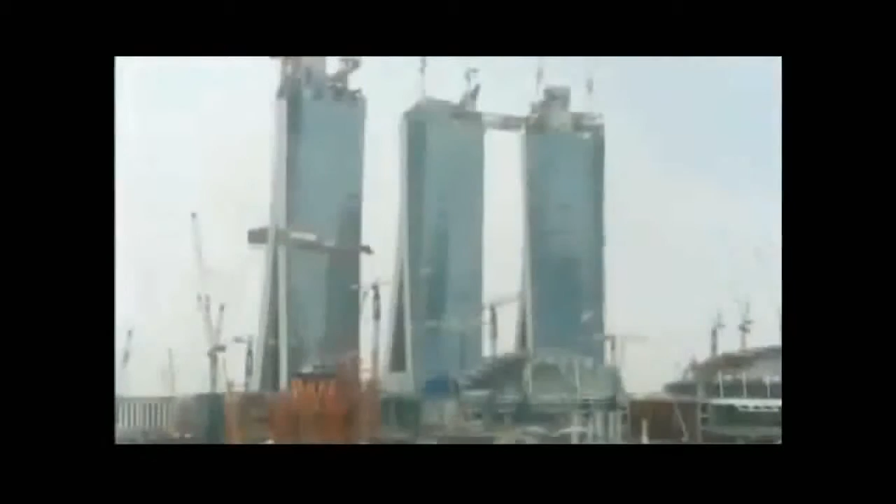Engineers have to build not one, but 3 skyscrapers that will shoulder a sky park as big as an aircraft carrier. Worst case scenario, we get stuck. They have to devise ingenious solutions to assemble a 60-meter tall museum of impractical dimensions, install giant artworks, and erect seemingly floating pavilions for shopping and entertainment. If engineers succeed, they will create a virtual city unto itself.

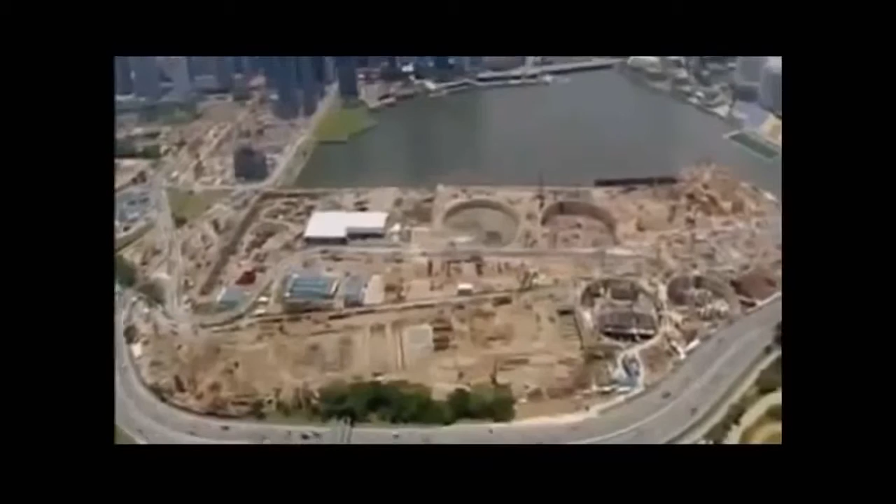Singapore. The Southeast Asian country is smaller than New York City. The lack of space forces it to build its largest leisure and entertainment hub to date on a small tract of reclaimed waterfront land. The Marina Bay Sands. It's not one megastructure, but many. Serious challenges lie in the array of buildings that form the unique complex.

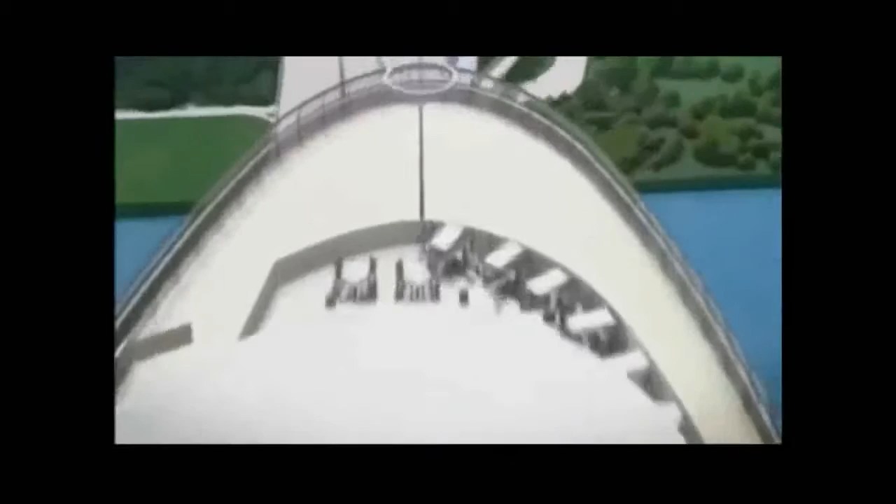3 55-story hotel towers slope at such great angles, they're in danger of buckling under their own weight. An even bigger problem is the hotel's roof. A 340-meter sky park spans its length, containing gardens, outdoor pools, and the world's largest cantilevered observation deck. But how do you build something as big as an aircraft carrier, 200 meters in the air?

In the hotel's atrium, mammoth works of art have to be somehow incorporated into the architecture. Its challenging centerpiece, a 15-ton mass of steel by a renegade artist from Britain. A 60-meter tall art science museum is designed for maximum visual impact. It will be to Singapore what the Opera House is to Sydney. Only one problem. It seems too impractical to construct.

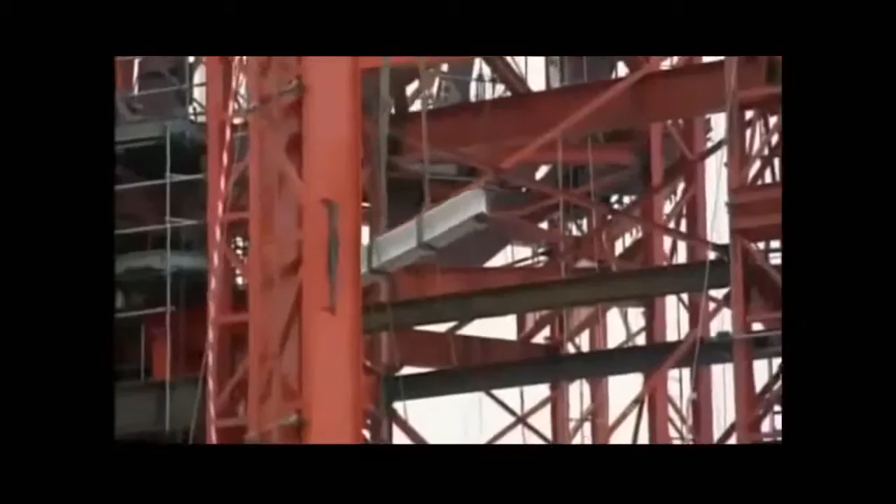And a set of dramatic glass-encased pavilions, while themselves pose little challenge, have to be built in water. The man behind the Marina Bay project understands the risks, but he believes that anything short of astounding will fail. Sheldon Adelson, one of the world's richest men and CEO of Las Vegas Sands Corporation.

What we hope to accomplish is to change the face of Singapore tourism. So we expect a very successful development. That is by far the largest and most expensive single project we've ever undertaken. It'll cost about 5 to 5.5 billion US dollars. It's a lot of money. Now, I know $1 billion doesn't buy what it used to, but by any measurement, it's a lot of money today.

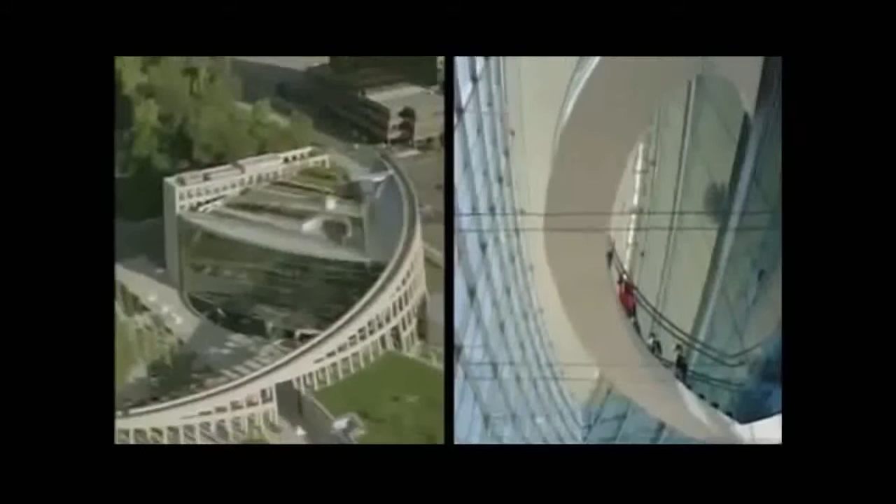Adelson believes his huge investment is safe in the hands of Moshe Safdie, a world-renowned architect. Safdie is recognized for his use of dramatic curves and geometric patterns. The Marina Bay complex will be his largest and most difficult project yet.

I think that architecture has to be timeless. Therefore, what it espouses, what it provides, needs to be something that has a long life. What's unique about Marina Bay is all the pieces coming together. You can't think about it as individual buildings. You've got to think about it as a piece of city. It's much more a symphony than it is a sonata.

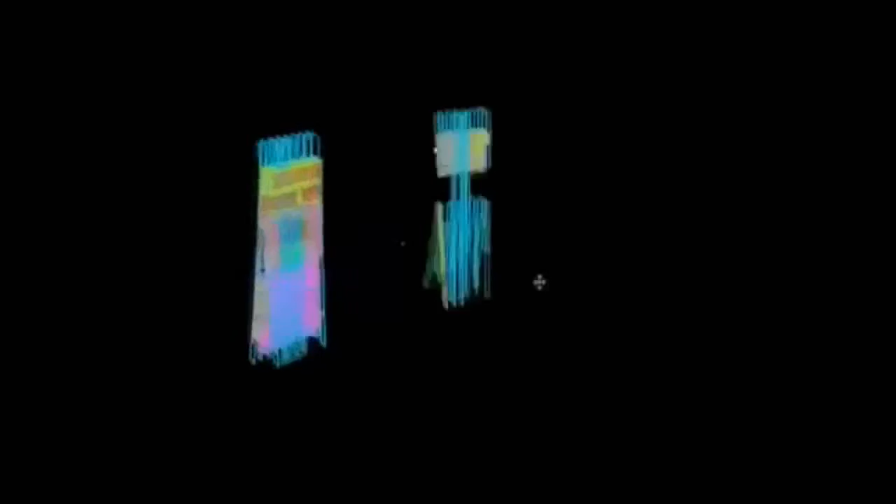On the ground, engineers are more concerned about the reality of building Safdie's vision. This is the North Retail section area. 30-year veteran John Downs is in charge of overseeing the entire project. The design is very, very diverse, and each component of the project is totally different from the others. For a project of this size, with the planning, the design, the construction, you'd be expecting somewhere between 6 to 7 years. Here is basically a 3-year turnaround.

The first and most critical construction task is to secure the footprint, though this normally straightforward job proves otherwise, since the site was originally allocated for boats. The complex sits on 560,000 square meters of reclaimed land, part of a decade-long plan to revamp Marina Bay, a former saltwater estuary that's now a freshwater reservoir.

Beneath the reclaimed land, which is essentially a seabed, is a dangerous layer of marine clay. Sometimes called black toothpaste, marine clay has very poor structural properties. If not given complete respect, the unstable marine clay is potentially fatal. In 2004, Singaporeans discovered the lethal consequences firsthand. A routine excavation in an underground tunnel for the mass rapid transit network causes a collapse, creating a gaping hole in the Nicoll Highway, killing 4 workers.

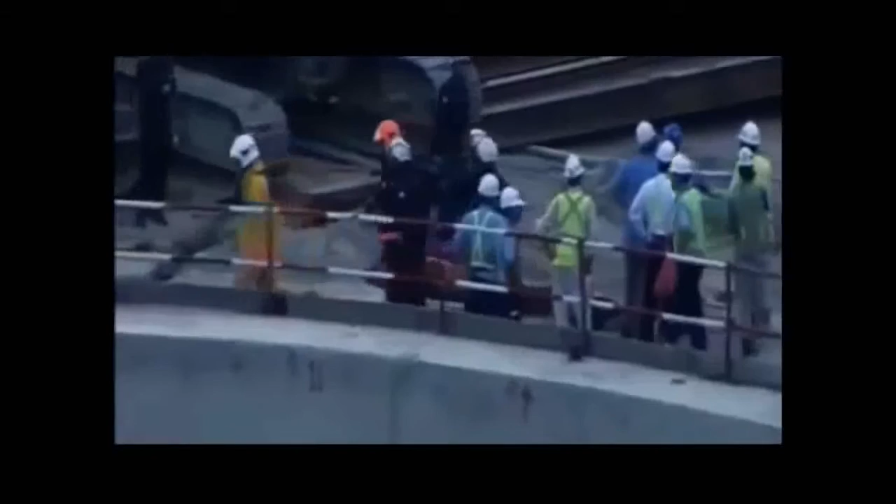The ground conditions in which they were building the Nicoll Highway were not dissimilar to those we are encountering here. They had also soft clay, they had similar depths of excavation between 20 and 37 meters. One of the big things that was learnt in the Nicoll Highway collapse was the importance of monitoring movements and the control of quality as the construction proceeds.

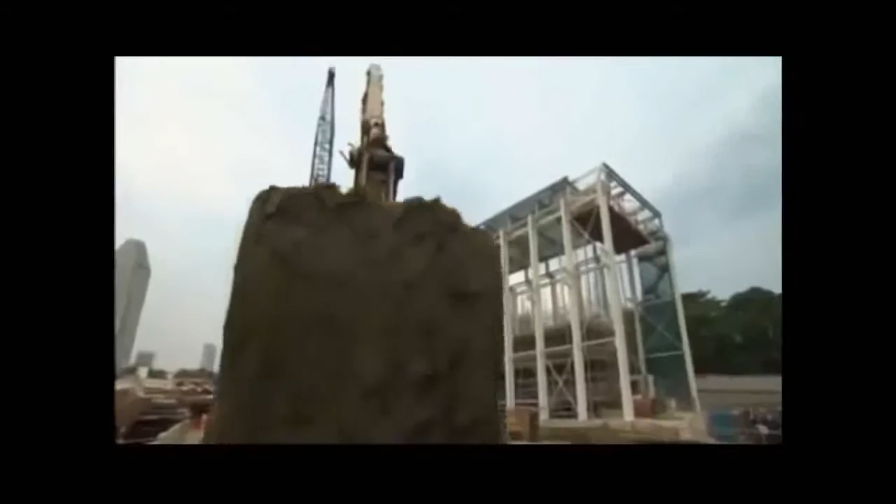Marine clay is an old foe of engineer Mike Barton. He's defeated it in the past by understanding how it behaves. The big problem with marine clay is that it is so soft that when you dig out the inside, the walls will move and potentially collapse and allow all the surrounding water in the bay into the excavation. So, before work can begin, the unstable building site needs major fortification.

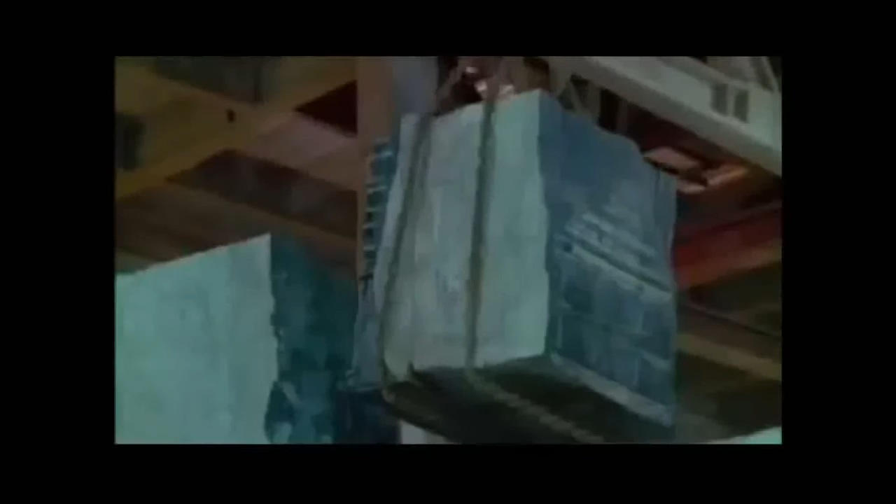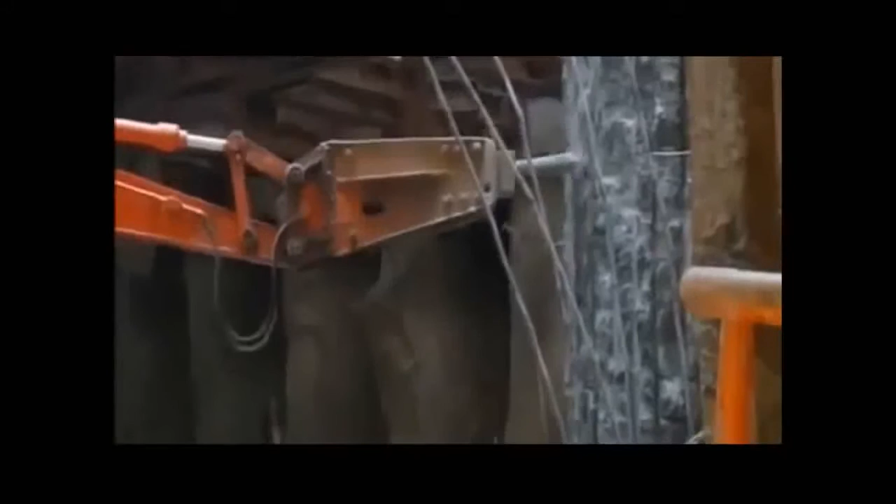To combat marine clay, engineers decide to build giant concrete walls to create stabilizing perimeters for the larger buildings, known as diaphragm walls. Up to 1.5 meters thick, diaphragm walls are steel-reinforced concrete sections, pounded 50 meters into the ground. They form watertight enclosures for men and machines to work round the clock. In just 1 year, over 4,000 meters of diaphragm walls help produce a rock-solid foundation.

The diaphragm walls that we constructed in a formation which we called a peanut formation, which is 2 circles joined together, and a donut formation, which is circular, is that they are able to withstand very, very large forces from the marine clay without any movement. They encapsulate an area that's bigger than a football pitch that enables us to excavate very quickly and to build structure up very quickly.

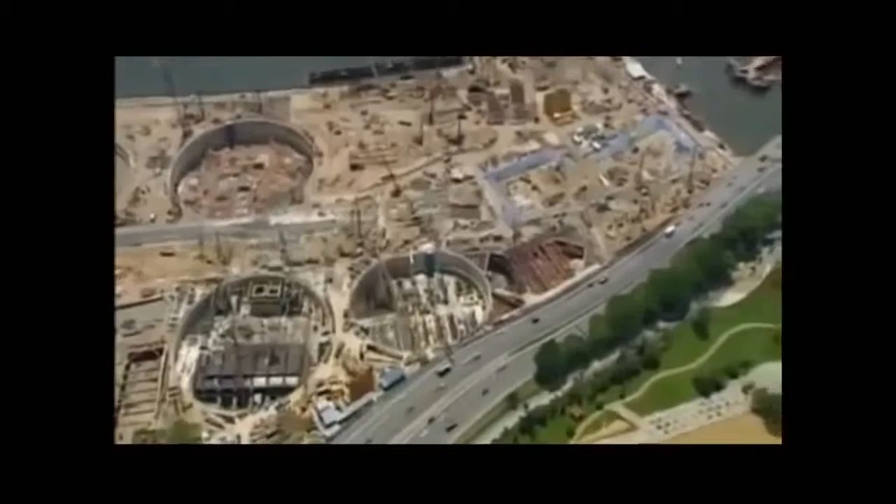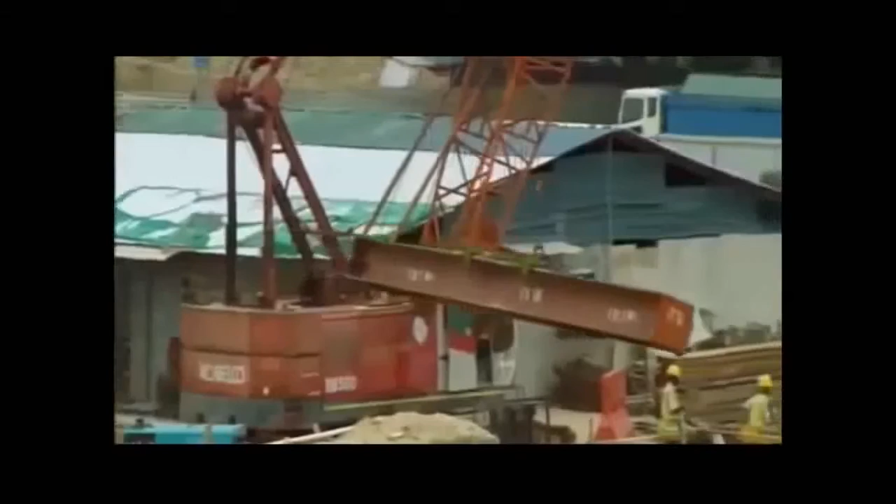Securing the footprint of the Marina Bay project has already taken a year out of John Downes' schedule. He now faces the difficult task of erecting the resort's many buildings in a space of just 2 years. Just managing the whole logistics of that, including the construction methodology, is very, very challenging for us. 1, 2, 3. To meet his tight deadline, Downes chooses the most direct solution. He hires 16,500 workers to construct every single building, simultaneously. It's like leading a small army. So organizational excellence is key.

We're just on the edge of Singapore in the CBD here. So rather than lose the contractors and the workforce to go off-site, we've built our own 3-story project office. We have all of our contractors, our subcontractors here. We house our resident site staff, we have our project management team, our construction management team, our design management team, and the logistics here.

Come lunchtime, the monster workforce creates another massive challenge for Downes. He responds by building one of the world's largest site canteens. We've got 13, 14 different food styles here. You can see by my shape and size that I eat here every day. I enjoy this food. So here you can see the project bakery.

It has its own ovens. It's set up for breakfast. We cater for sandwiches during the course of the day. Can I take a sausage roll, please? So, freshly cooked food, straight from the oven. We stand by our products.

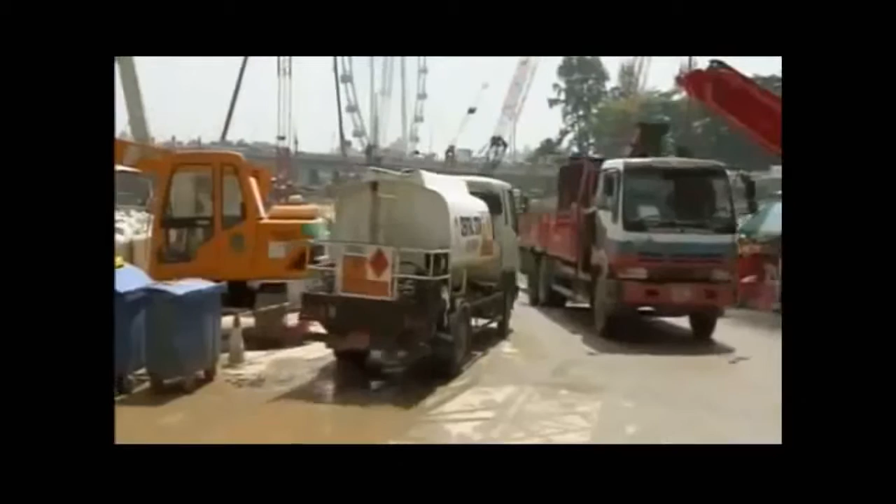The tight schedule also creates problems at the hotel towers, where engineers are already struggling with a congested site. The important thing to do is to make sure that they come in and deliver the goods straight away and then get out again. We don't want too many vehicles on site at the same time. To speed up construction and alleviate traffic congestion, engineers turn to a method that's proven itself countless times in the field: precast concrete casting.

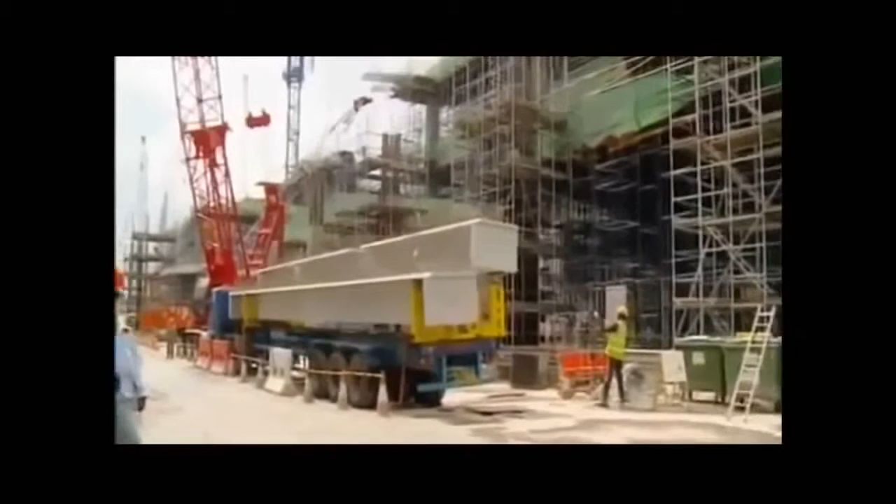Hotel walls are made on site in the thousands. And workers laying the floors are so proficient, they produce one floor per 4-day cycle. It's an impressive display for a conventional solution. But the structure they're attempting is anything but conventional. The key challenge of building the hotel towers is its unusual design. Unlike other skyscrapers, part of the towers slope at incredible inclines. Like a set of collapsing dominoes, the towers could buckle under their own weight if a practical building solution is not found.

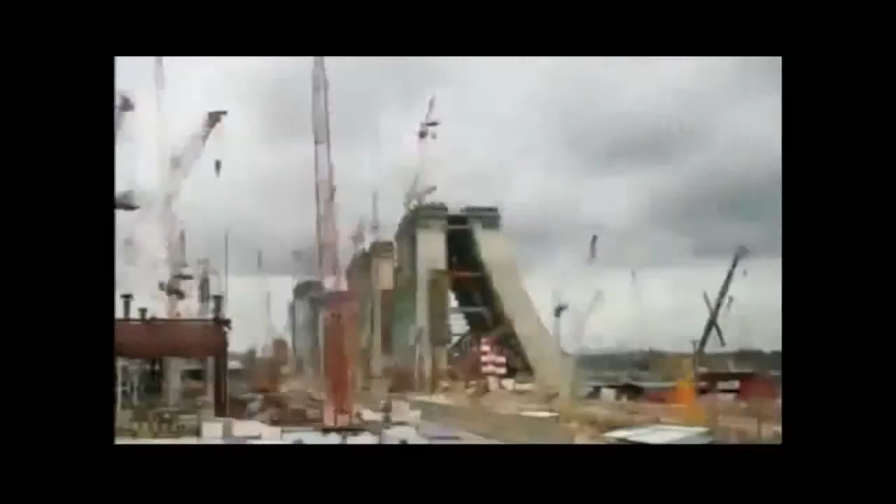It's a major concern for engineer Craig Glover. I've been in the industry for 25 years, done a wide range of projects in many different countries, but nothing compares to this whatsoever. There was nothing we could take reference from across the street, on the next high rise, or across town. This is a new frontier. Costing a staggering $5.5 billion to build, the Marina Bay Sands could be one of the world's most expensive mistakes if engineers can't solve the tower's problematic structure.

Engineer V.C. Cheong leads the design team, and their solution comes out of left field. If you look at the configuration, it's not a straight tower. It's with a sloping leg. So all this sloping leg actually is inducing a very huge external force onto the structure. We cannot build it without any support. So we actually formulate a solution to prop up the sloping edge.

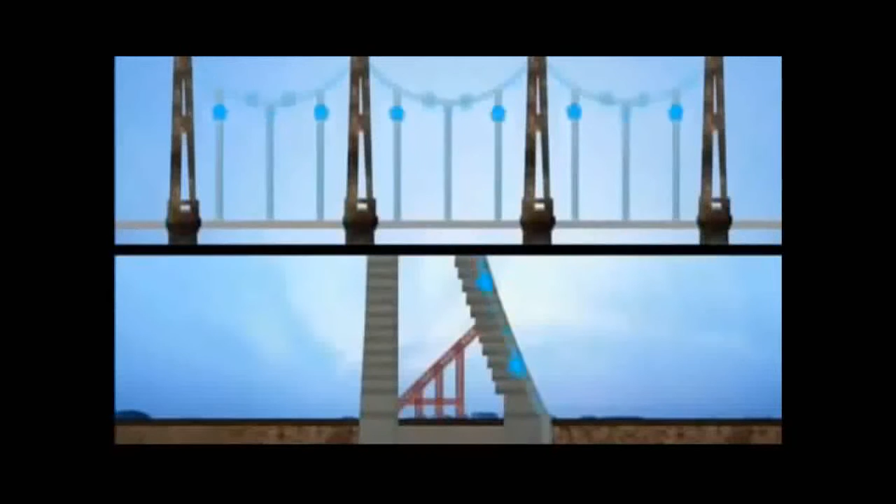Using a technique they've never employed before, engineers build large temporary struts made of strong structural steel. They prop up the sloping towers as they rise. Like a suspension bridge, high tensile steel tendons, also known as tension cables, give an added layer of support inside the walls. In theory, both the struts and the tension cables are temporary and will be removed once giant link trusses connect the towers at the 23rd floor.

The sheer weight in concrete is enough to topple the towers at level 8 if the engineer's calculations are wrong. To reduce the chances of failure, Glover and his team make a radical decision. Instead of removing the temporary tension cables in the tower walls, they make them permanent supports. I feel good it's in there because it's added strength, it's added support.

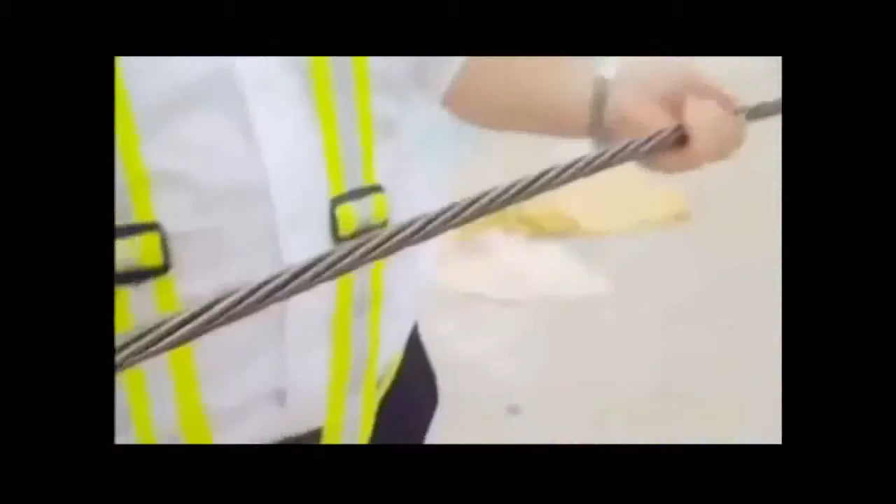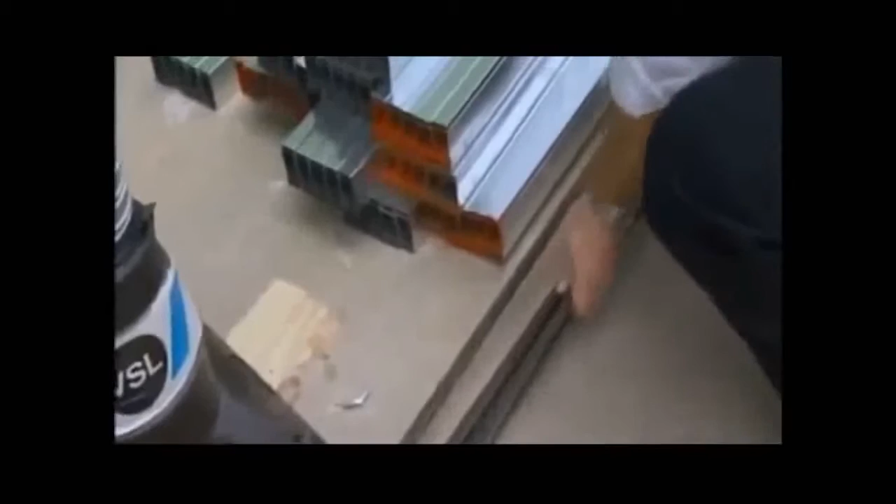We have a twined network here of high-strength steel. And what we do is we bundle these up so they form a cord with multiple strands inside this conduit. We place this conduit inside the walls prior to casting the concrete. So what we then do is once the concrete is cast, we anchor one end into the concrete. So we then put a very high strength hydraulic jack onto the collar and one by one pull these strands through and tension them up. What that does is basically pull the building back and hold it in place.

If these cables were to suddenly break or if they weren't in place, we wouldn't be able to control the self-weight as we build more and more of the building up. So it's a very important part of the actual engineering of the solution to hold the building in place until we can connect it. Despite the team's quick thinking, the true test of their engineering decisions will only happen once the main support struts are removed and the massive link trusses installed.

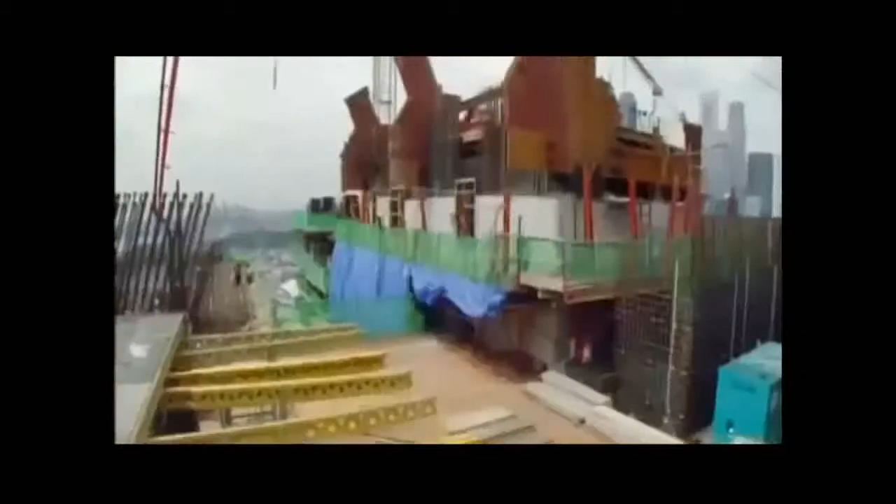Link trusses are huge reinforced steel brackets that bind the towers at the 23rd floor. Once their installation is complete, they transfer the sloping tower's weight completely away from its temporary struts. Once we're satisfied that we don't have any stability issues, then we can bring the large hydraulic cranes in and member by member start to dismantle the struts. We've got a lot of time pressure, so we've just got to make sure that these things keep moving. It's done its job holding up the building, now it's holding up the job.

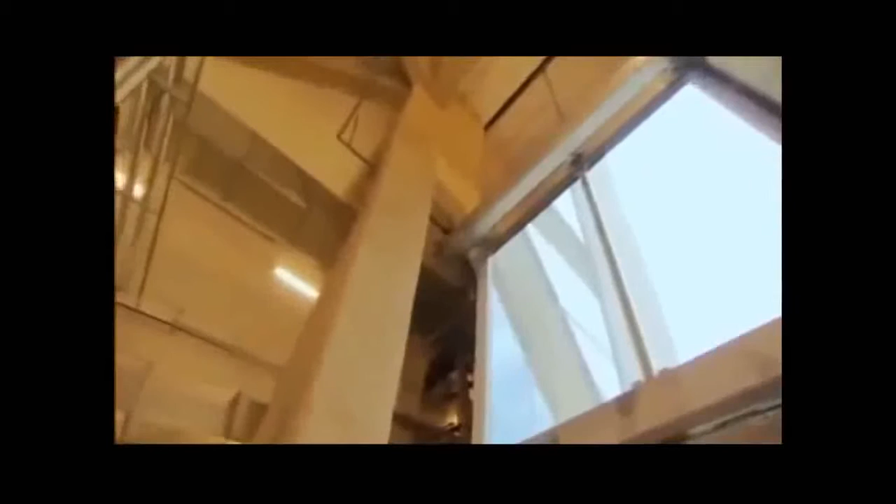As the last pieces of support struts leave the site, Glover and his team can finally breathe a sigh of relief. The link trusses are holding the building load. So far, so good. It's a lot of theory, a lot of calculations, but until you really do it and really get it out of the building, you never quite know. I'm always waiting for the phone to call in the middle of the night that something's gone wrong.

Not all the structures have ended up according to plan. The 60-meter-high Art Science Museum is facing a major design overhaul. Planned as a venue for blockbuster exhibitions on the arts and sciences, its bowl-shaped roof doubles as a 3,000-seat amphitheater. Unfortunately for engineers eager to start its construction, architect Moshe Safdie isn't happy with its current shape.

Somebody looked at them and said, looks like a bunch of bananas. In fact, Mr. Adelson said, looks like a bunch of bananas. I said, well, if they look like a bunch of bananas, we're not there yet. Do the structural engineers have a preference?

It's terrible news for Safdie's design team, especially its principal, Gene Dyer. There are times that Moshe will come in with an idea. We think it's quite exciting. We'll pursue the idea for weeks or even months. He'll come back and say, I want to change the idea. And we've already bought into the idea, so it's a bit frustrating.

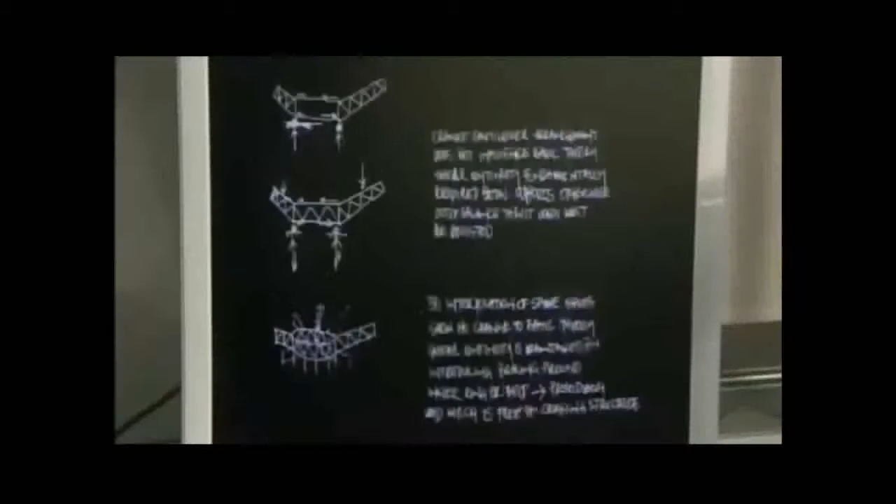To rework the unique geometry and dimensions of the Art Science Museum, Dyer and his team turned to advanced 3D modeling programs. It not only makes navigating the museum's complex geometric patterns easier, it shortens the process to a matter of days. The model is dynamic and it can be moved by just changing one or two elements. Moshe could experiment. He could make rapid judgments in a very short period of time about which way he wanted to take the project. This is a process that was impossible to do 10 years ago. Without the computer, this would take years and years and years.

To rationalize the new look into a buildable structure, architect David Robbins splits the museum into spheroid segments. We began to look at using different spheroids to define the different upper and lower surfaces of this building. That gave us a very rational way of describing the plan form to our clients. After months of refining the design, Safdie is finally happy with the result. The mathematical precision that we gave them made them even more beautiful.

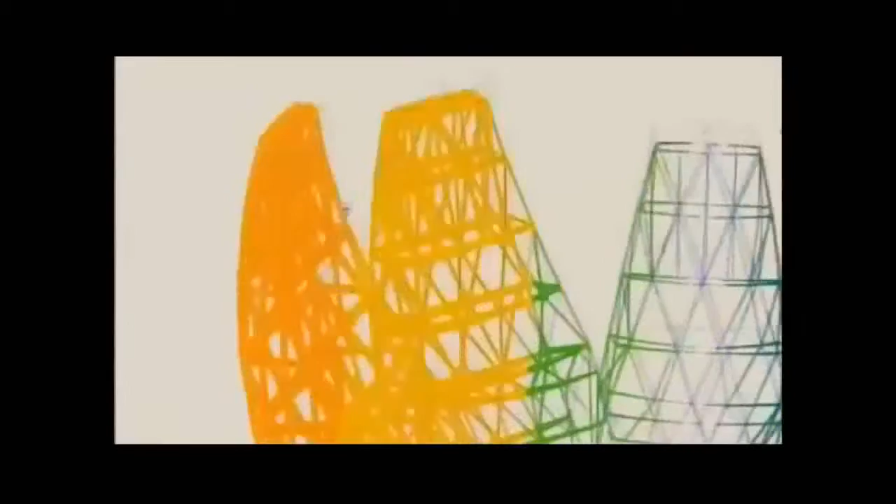It led some people to say, well, hand of welcome. Others said, is that a lotus? And the more ambiguous the associations, the closer I thought we were getting to our target. Because I think the least exciting buildings are those which have overt symbolic associations.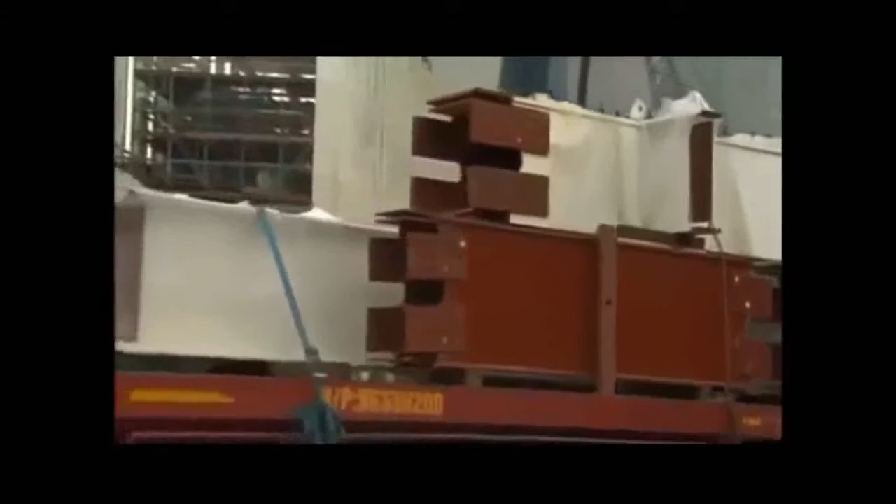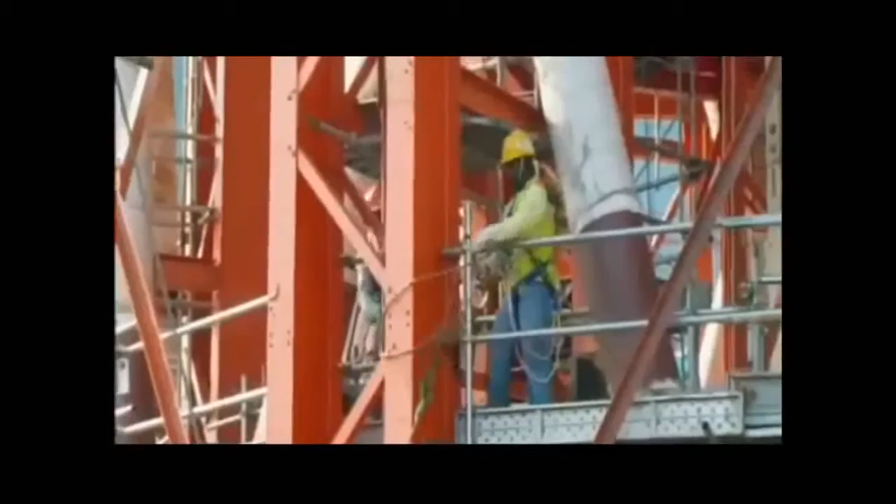Armed with the new design, engineers begin work on the museum's 60-meter-high superstructure. A staggering 5,600 steel elements, weighing some 5,200 tons, are prefabricated to exact specifications. They are then trucked onto site and assembled. It's like putting together a giant jigsaw puzzle. Each element has to be installed with pinpoint accuracy. If it's even a few millimeters off, engineers will have to start from scratch.

Engineers of the massive atrium at the base of the towers are facing an equally tough construction process.

Safdie has come up with a challenging design. He wants to inject art into the atrium's architecture, so that visitors will feel like they're walking through a grand Gothic cathedral. In medieval times, if you think of a Gothic cathedral, there's the architecture, there's the stained glass windows, there's the sculptures on the pinnacles. You cannot draw a line and say art and architecture. Art and architecture are one, they're singular experiences. And I think what we try to do here is come back to this integrative mode.

To create the centerpiece of his vision for the atrium, Safdie commissions renowned British sculptor Antony Gormley. Famous for his unusual approach to art, Gormley is the brains behind the Angel of the North sculpture in northern England. What he's about to attempt is proving to be more of a construction challenge than an artistic one. A cloud-like sculpture some 40 meters long, made up of 15 tons of high-grade stainless steel, hung 12 stories above the atrium.

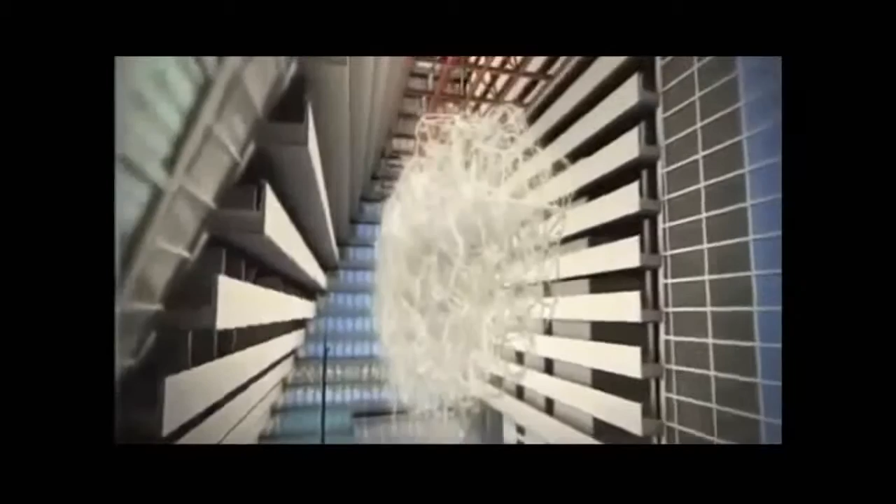The Angel of the North is, in a way, making a very traditional public sculpture because it's isolated in space at the edge of a valley. You can see it for miles and miles. It's very much about occupying space. This is about activating space. You can't see it for miles and miles. You have to be in the space with it. Each viewer, every person coming out of their hotel room will confront this big chaos thing and have to find their place in it. I think that's an exciting thing.

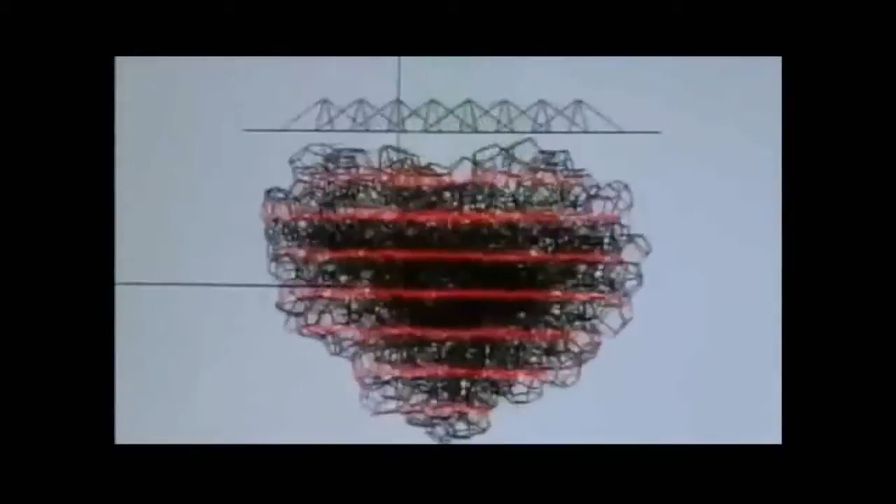Called Drift, Gormley's steel sculpture is so huge and so complex that it can't be sculpted using traditional methods. Gormley's team has to create state-of-the-art 3D computer programs that translate his ideas into buildable plans. But just as they're about to begin construction, a bombshell drops. September 2008, a global financial crisis wreaks havoc on markets. The flow of the hundreds of millions of dollars that keep the Marina Bay project going every month suddenly stops.

For engineer Matthew Pryor, it's a massive blow. I feel devastated. I mean, it couldn't be worse. Probably the worst day of my life professionally. There's no more money coming through. So unless we put some funding in place or there's something, we're going to have to shut the jobs down. There's a tough decision to be made, and we don't know what we're going to do just at this point in time. With the future of the multi-billion-dollar project plunged into doubt, all eyes turn to the man behind it, Sheldon Adelson. The next move of one of the world's richest men will determine the fate of the mega construction site.

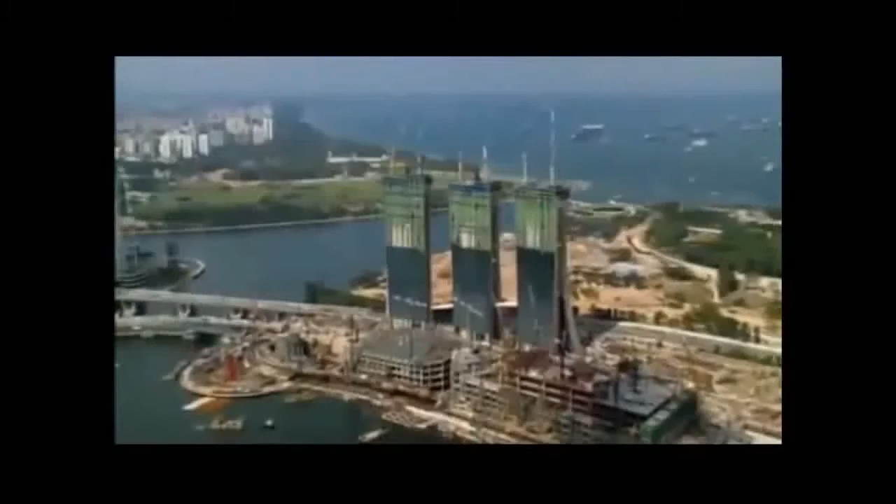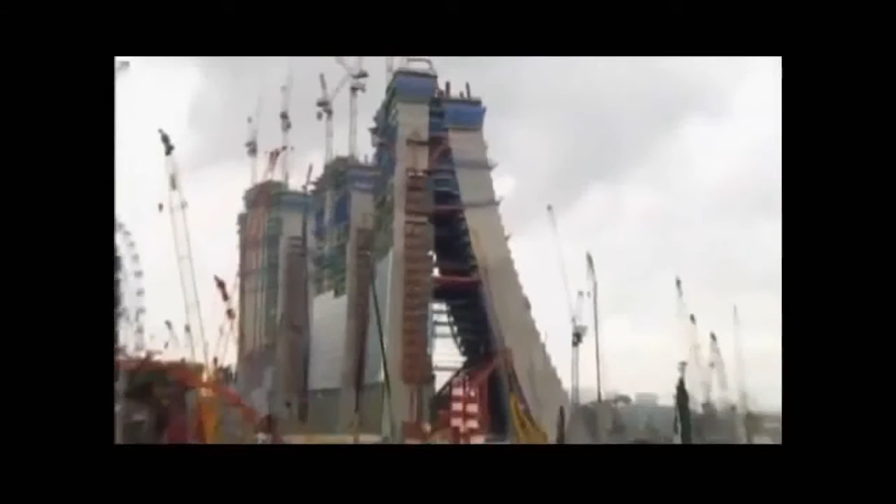The 2008 global financial meltdown is a haunting echo of the 1990s Asian crisis. Back then, progress on Shanghai's World Financial Center came to a complete halt for 5 years. For Adelson, that's simply not an option for the high-profile Marina Bay resort. His vision of changing the face of Singapore tourism is at stake, and so are billions of dollars of investment from his Las Vegas Sands Corporation. He prefers finding a stopgap solution to weather the storm. Throughout history, there has never been a trend that went straight up, nor a trend that went straight down. So it goes up and down. It's only a matter of time when things will recover.

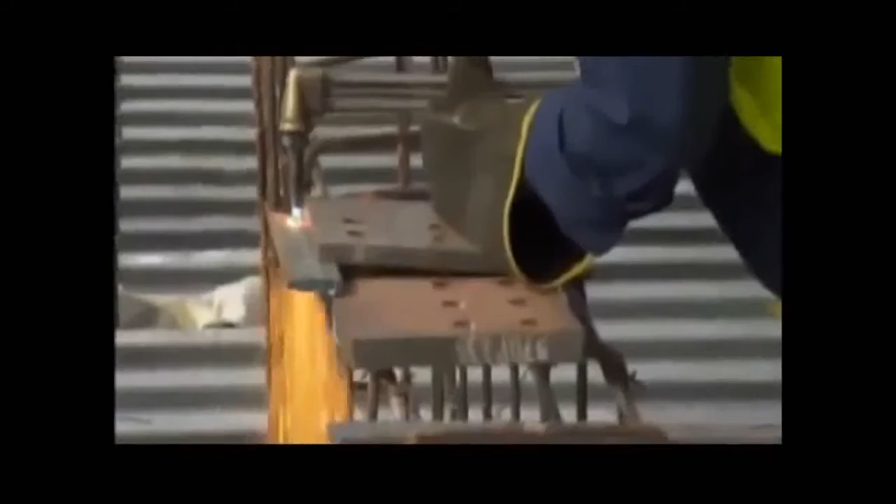In a bold move, Adelson pledges his vast personal wealth to the completion of the project, effectively ending any speculation of failure. There's a massive sense of relief in the company. I mean, everyone pleasantly surprised how quickly we've got through this and the fact we could hold it together and get it going again. So euphoria is probably the best way to describe it. With the crisis averted, construction on the 3 57-story hotel towers, the casino, theaters and convention center resumes at pace. Everywhere you turn, steel is being installed. It's vital reinforcement for every concrete structure on the 15.5-hectare site.

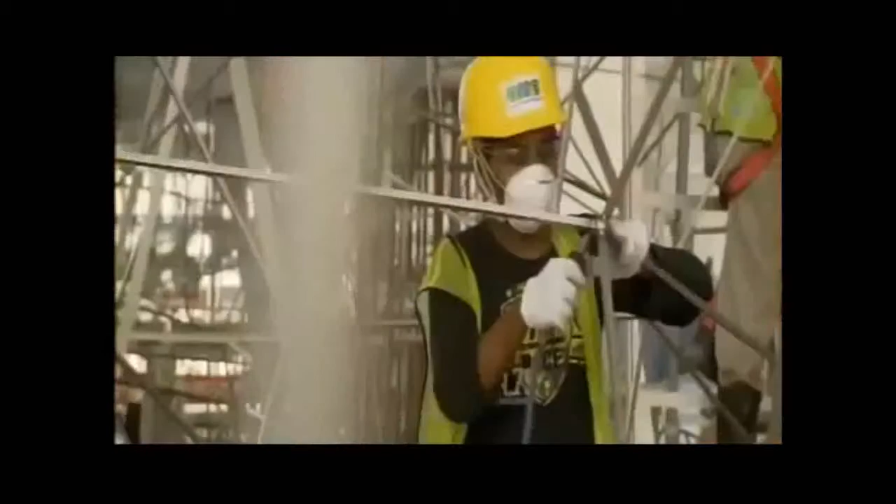For one project at the tower's atrium, steel is more than just reinforcement. To construct the 15-ton Drift sculpture by British artist Antony Gormley, engineers had to first laboriously prefabricate it into over 70 segments. The segments are then welded into 8 slices and will ultimately form the sculpture. It's a tricky operation, but engineers are able to complete it swiftly due to a system of codes and numbers that enable them to quickly identify what goes where.

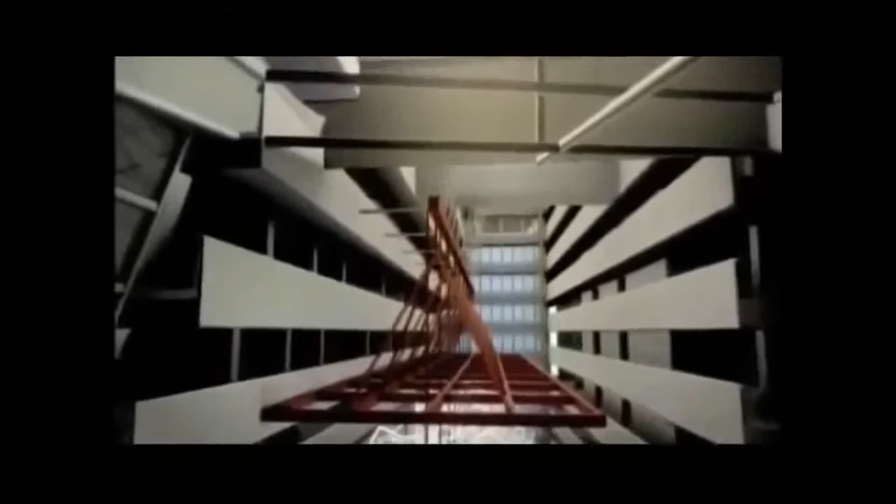Once all 8 slices of Drift are fully assembled, it's lifted up into position by a temporary lifting frame. A massive box truss on the atrium ceiling then takes over the load. In theory, the box truss will support the weight of the lifting frame as it's being lowered down. It will be a heart-stopping moment, especially for engineer Graham Stevenson. The lifting frame is about 9.5 tons, so when it picks up and gets some momentum, there's a potential that it just wants to flick over and rotate through its full 90 degrees, and we won't have it under control.

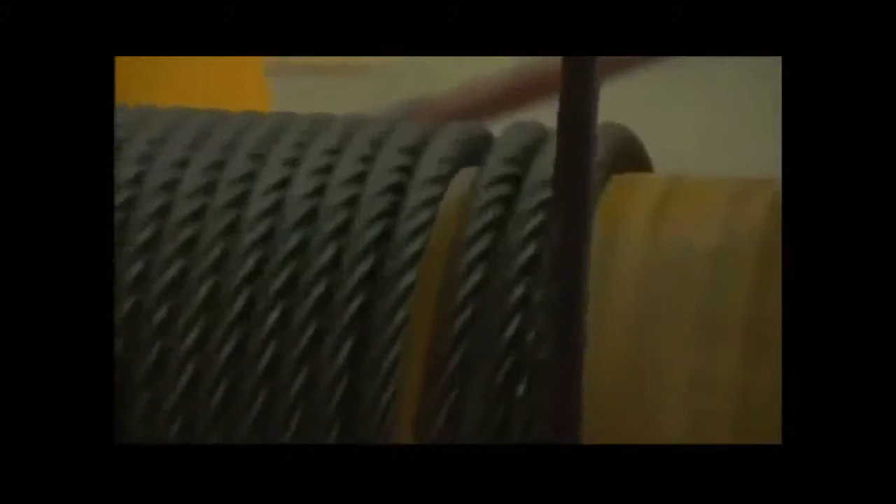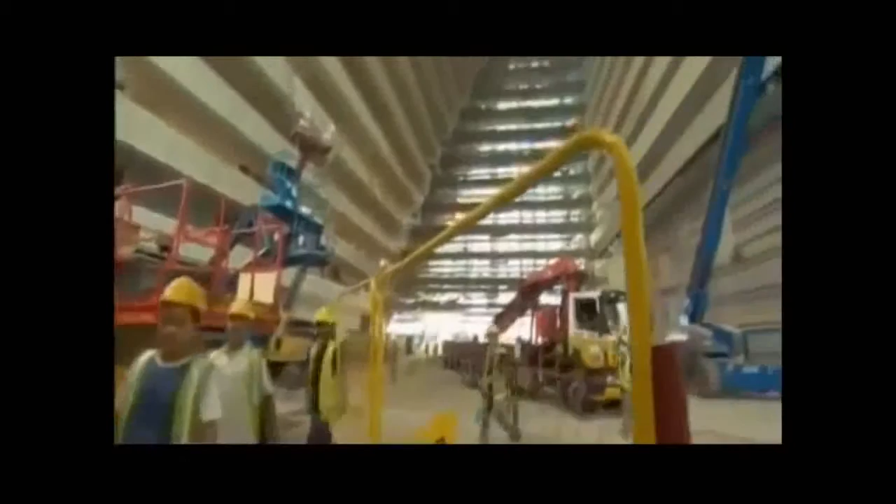Stevenson's solution: 4 powerful automated hoisting drums located at the 4 corners of the frame. They allow workers to control the strength and speed of the operation with high tensile steel cables. A spotter at the top determines the pace of the procedure and marshals the team. With their preparations complete, it's time to face the moment of truth. Sculptor Antony Gormley is as anxious as any of the team.

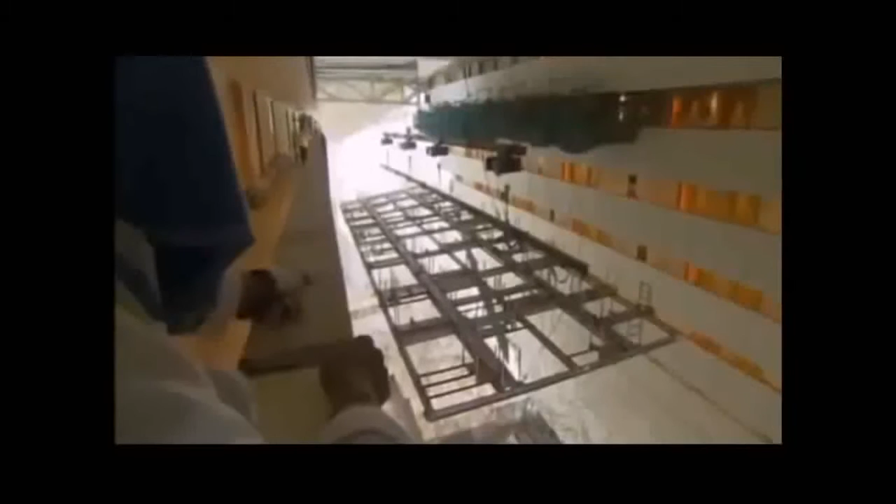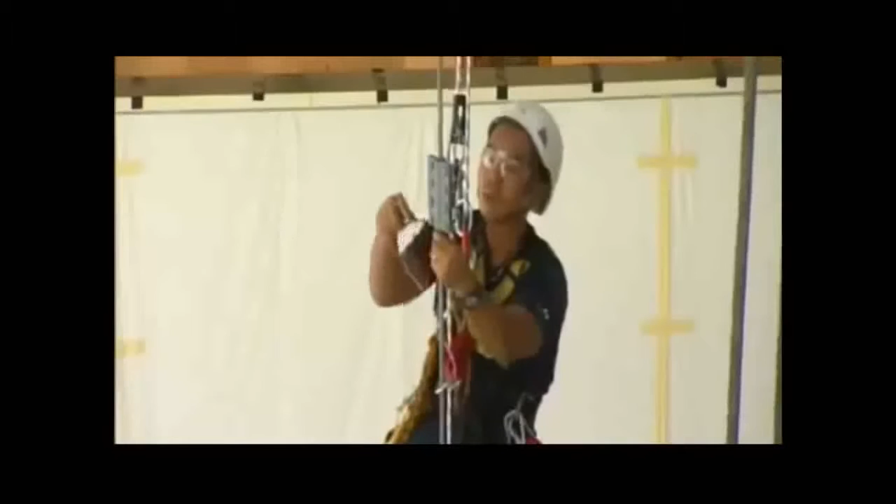The entire operation is estimated to take up to 10 hours to complete. As soon as the frame is in motion, there's no turning back. Midway through the lift, Stevenson receives reports of a potential problem. 22-story, number 7 temporary cable, scaffolding touching the cable. Why you got the temporary cable touching to the transverse? Yeah, but is it just the end of a tube? Yeah. So you can just cut the tube? Yeah. Problem solved.

But what was previously an estimated 10-hour procedure now turns out to be a 24-hour marathon lift. At 6 a.m. the following morning, they complete the job. Absolutely fantastic. The Gormley's now finally in its final position, so really an end of a long and exhausting day, and big thanks to everybody, but it's finally done.

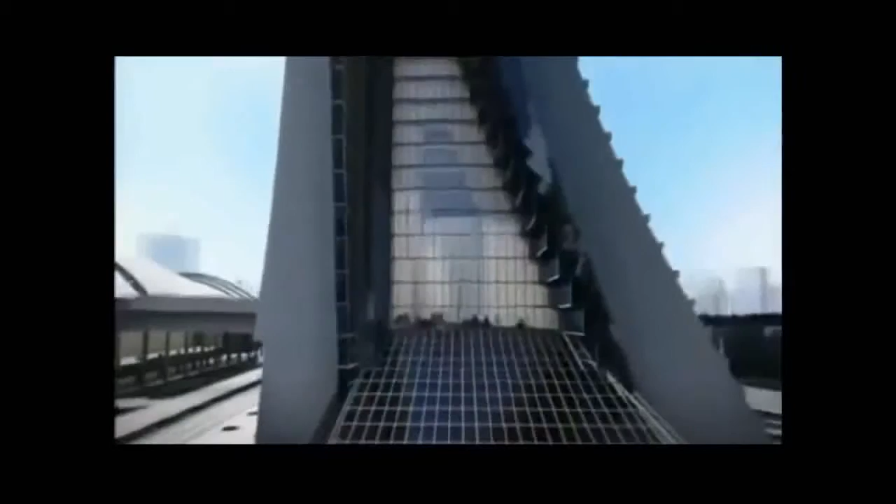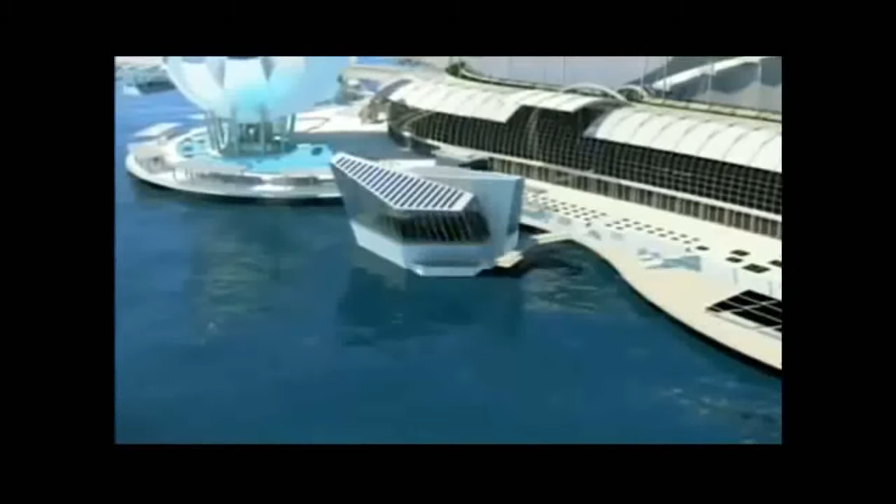While the drift settles into its new home at the hotel atrium, elsewhere attention is focused on one of the project's key features, the crystal pavilions. The two glass-encased buildings by the promenade are set to be the resort's premier shopping and entertainment complexes. But before engineers can make them a reality, they have to secure their footprint. And already a major obstacle threatens to sink their objective. The crystal pavilions are situated within the confines of Marina Bay. So to found it, engineers have to find a way to build in 6 meters of water.

The responsibility of tackling the problem falls on the shoulders of engineer Kurt Vella. I'm from Sydney. The underlying foundation in Sydney is sandstone, it's rock. All you need to do is just dust off the surface and you can build skyscrapers on it. Here it's very different. All the structures have to be heavily founded.

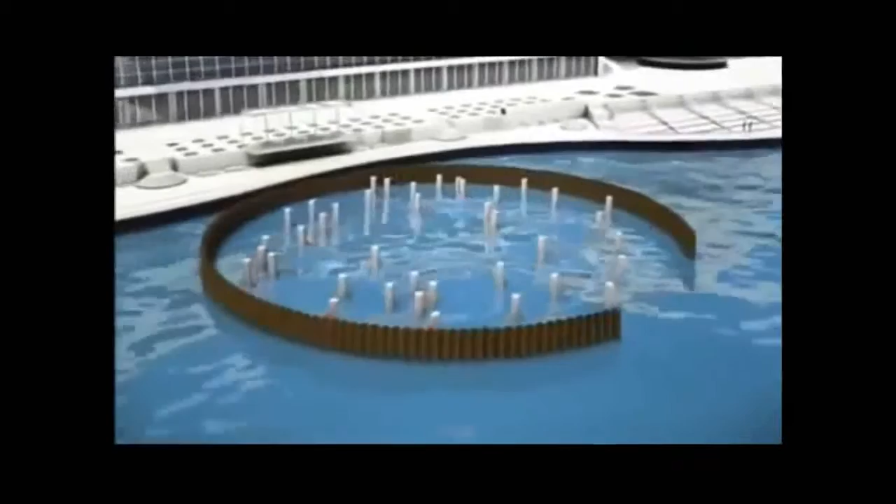To keep water out of the construction site, only one solution seems viable for Vella and his team. A waterproof steel structure called a cofferdam. This temporary formation surrounds the worksite with a circle of steel sheet piles, creating an impenetrable shield that locks out the water, keeping the workers safe within. For the job, they rope in a 12-ton vibro hammer. It punches the sheet piles deep into the earth, making the cofferdam rock solid and resistant to movement.

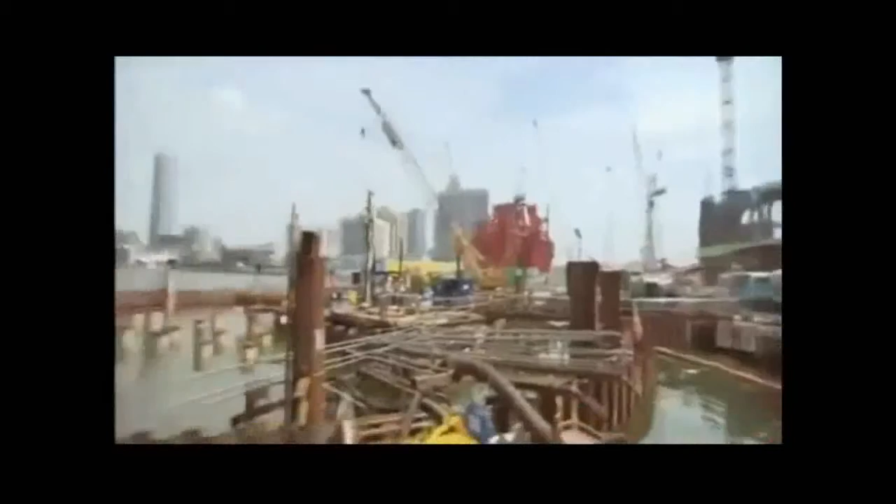With the cofferdam secured, engineers deploy powerful diesel pumps and run them 24 hours a day, ejecting any water that remains within the walls. This last step comes with inherent dangers. The force of the water outside creates what engineers call hydrostatic pressure. In theory, it's powerful enough to force water through any gaps in the cofferdam. It's something that Vella prays will not happen.

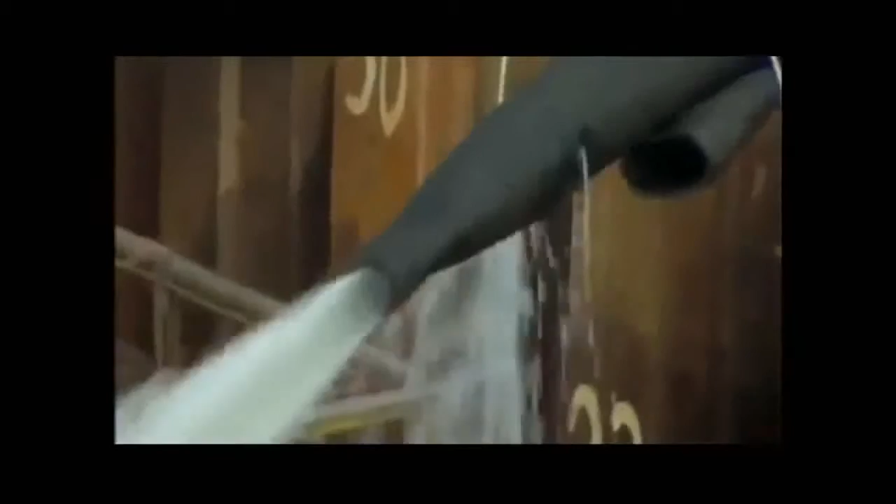There's a bit of hesitancy and concern because we've got to build this building in the middle of Marina Bay. Everybody can see what we're doing, so if it leaks, it's a problem. If it fails, if it moves, if it collapses, it'll be an absolute catastrophe. After a day of pumping, Vella's worst fear comes true. Parts of the cofferdam are leaking. To rectify the problem, Vella orders a team of 8 divers into the water on 10-hour shifts. Their mission? Find out where the water is being forced in and plug them shut with epoxy resin.

Anson Lee is an 8-year diving veteran. The toughest part of my job is the environment. The visibility is poor here. It is totally zero, I cannot see anything here below. I solve that by feeling the suction and then feeling out the thing. You have to overcome all the fear that you can't see under the water, but okay lah. I feel proud to be one of this team to build this thing out.

After 2 weeks of hard work by divers and the pump crew, the job is finally complete. Kurt Vella can also breathe easy. Every job is different, every job has its challenges. You plan and prepare, you try and identify your risks in advance, and you try and come up with contingency plans. And that's what's really enjoyable from my perspective. That's what gets me out of bed in the morning.

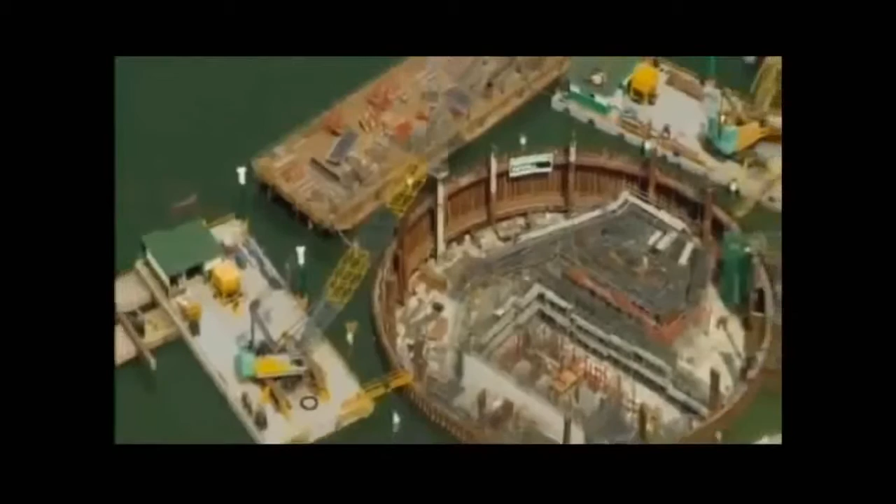After 2 years of battling the elements and overcoming difficult construction milestones, the 3 sloping towers of Marina Bay Sands can finally celebrate their topping off ceremony and move on to the next phase. But a destructive force of nature threatens to throw a spanner in the works. With climate change predicted to affect the pattern of Southeast Asia's typhoons, Singapore may one day experience the destructive tropical storms plaguing its northern neighbors in the Philippines and Taiwan.

When that happens, typhoon-force winds could spell disaster for the hotel towers, especially the 340-meter sky park sitting on top of it. The force of the wind can make both buildings sway dangerously, causing irreparable damage to the structures.

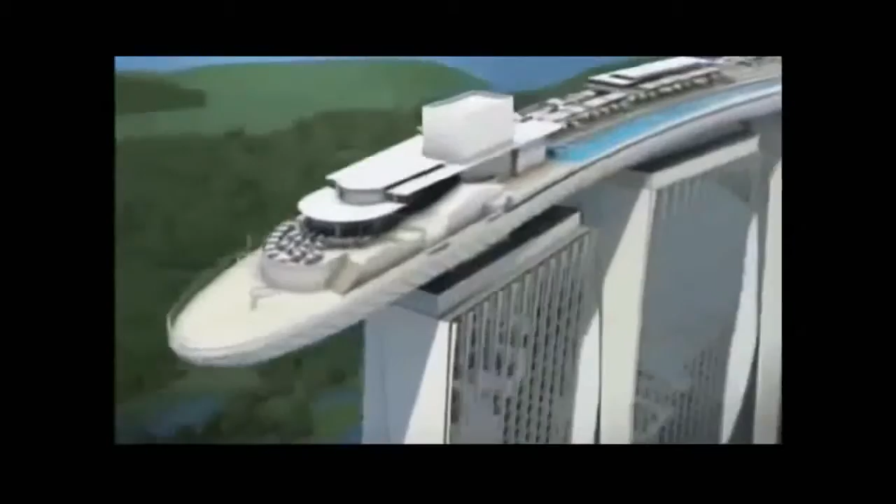The Sky Park, offering 360-degree views of Singapore. The visionary design will have enough surface area to park 4.5 Airbus A380s. But when architect Moshe Safdie first mooted it, it stemmed from a purely functional need.

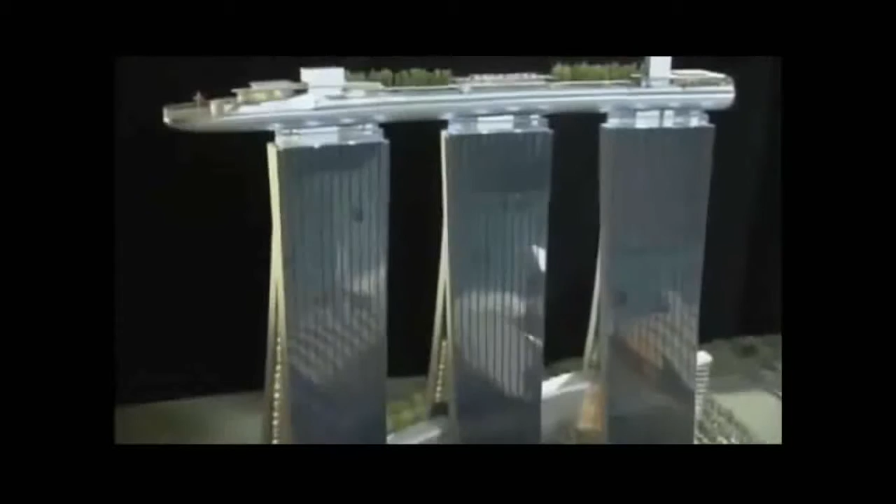Safdie's revolutionary idea scores points for ingenuity, but it clearly isn't what nature intended. Typhoon-force winds threaten to rock the towers and its sky park, causing unimaginable damage. If engineers are to make the building a reality, they'll need a rock-solid solution. Still got to do all this cladding.

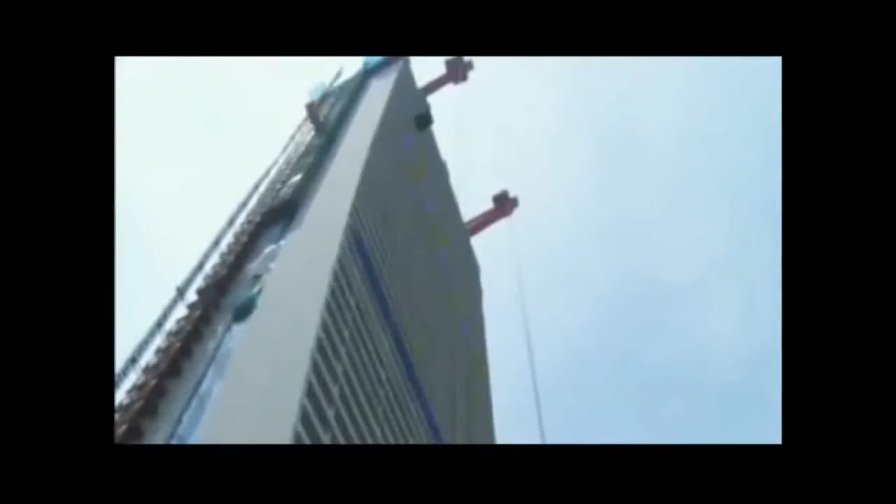Engineer Tony McKee has little time to make things happen. At the moment, we're running a couple of weeks behind what we'd originally planned. We're not entirely happy about it, but at the end of the day, we've got to do this safe, and we've got to do it properly. You're safe close to the...

To fight the enemy, McKee knows he has to first understand the enemy. He hires leading US wind engineers CPP to carry out extensive testing on the towers and Sky Park. Their mission? Find out how Singapore's potential wind forces affect the buildings. We turned that upside down. Wind engineer Roy Denoon oversees the process at their state-of-the-art wind tunnel in Fort Collins, Colorado.

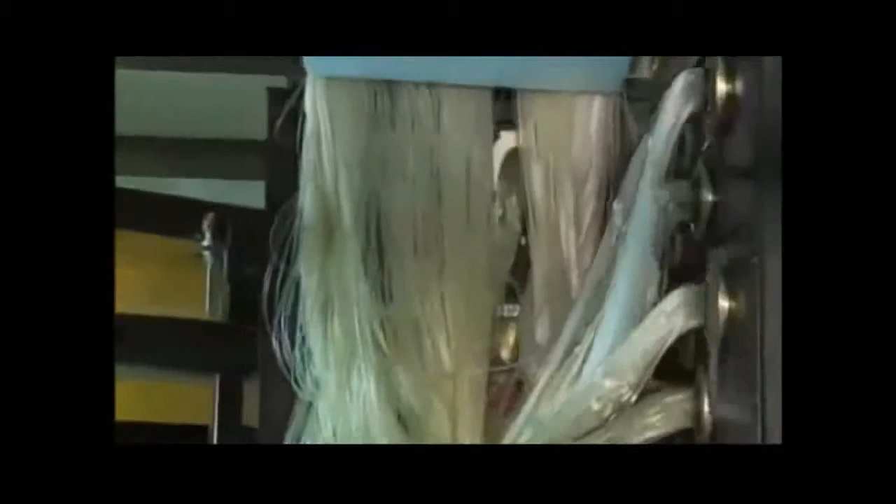The thing that makes this really special is the fact that we have this sky park running across the top, linking all the towers together. So whereas normally with a normal tower, we'd measure the loads on the tower in isolation, with this one, what we're needing to do is to measure the loads on all 3 of the towers at exactly the same time. So that way we can know how the towers are going to move relative to each other, so we can make sure that they're not going to put excessive strains or movements into the sky park.

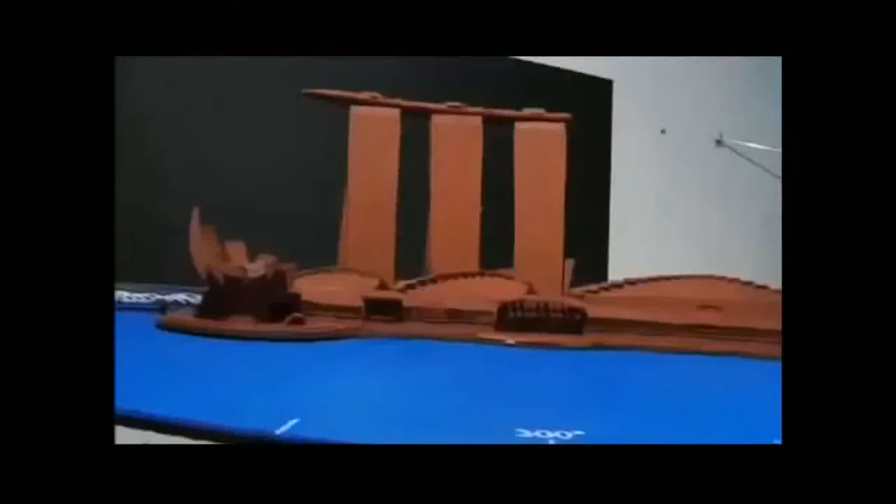During the tests, a scale model of the Marina Bay Towers is blasted with 40km/h winds to simulate faster typhoon winds in reality. Over 1,000 pressure measuring instruments inside the model register how the winds affect the buildings. At the end of the tests, engineers confirm that the 3 towers can deform by some 200 millimeters during the fiercest storm.

Engineers quickly figure out a solution: movement joints. Inspired by bridge engineering philosophy, movement joints are essentially gaps located between the concrete towers. The huge gaps allow for movements of up to 250 millimeters. Aluminium and stainless steel plates act as sliding components.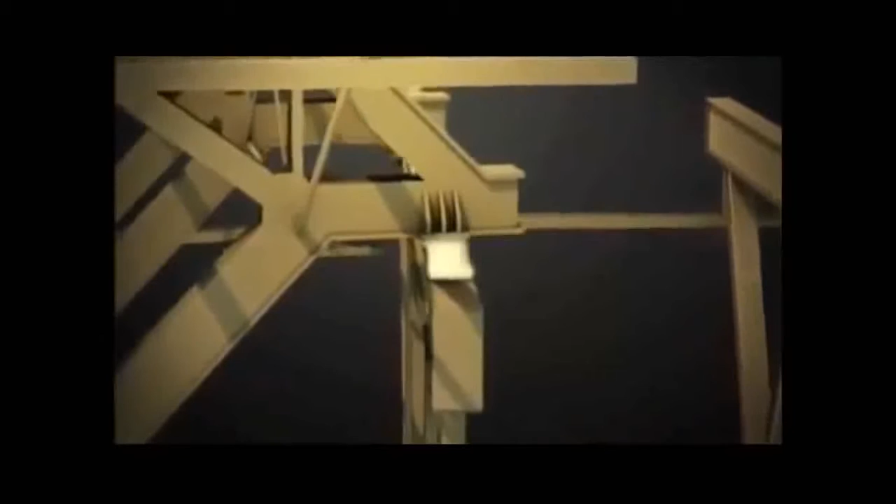They can move back and forward over each other, a little bit like you'd see in a flexible bus, where you have that articulation happening in the middle. It's a similar concept to that. To accommodate the differing movements of the three towers, engineers install multi-directional steel bearings below the sky park. The solution scores major points with Tony McKee.

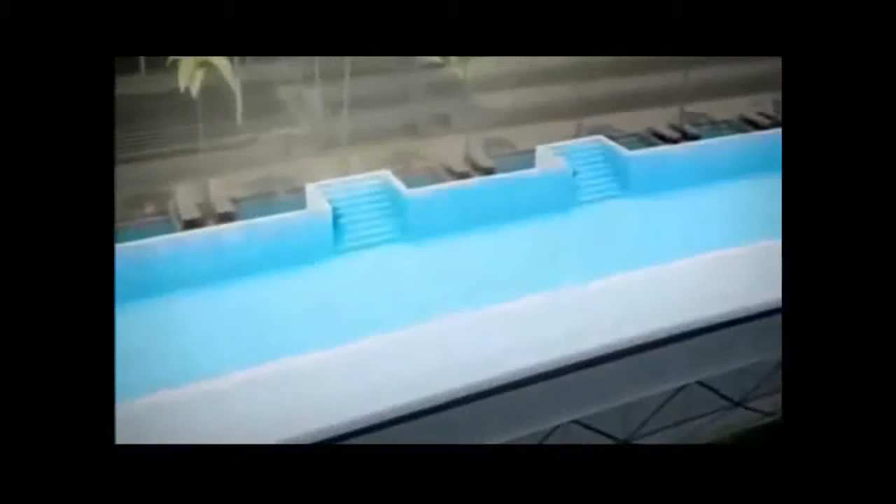Only one problem. It won't work with a rigid structure containing 1.5 million litres of water. Any movement in the joints could fracture the sky park swimming pool, endangering lives and property below. With the help of US pool builders Natare, McKee quickly develops a solution, but it's completely unproven. A secondary system of movement joints built into the pool itself.

The plan, to split the pool into 3 smaller 50-meter units. Steel top hats then conceal the gaps. Huge basins catch any runoff pushed up by the moving pools. McKee knows he only has one chance at making this work. So he commissions a trial by water.

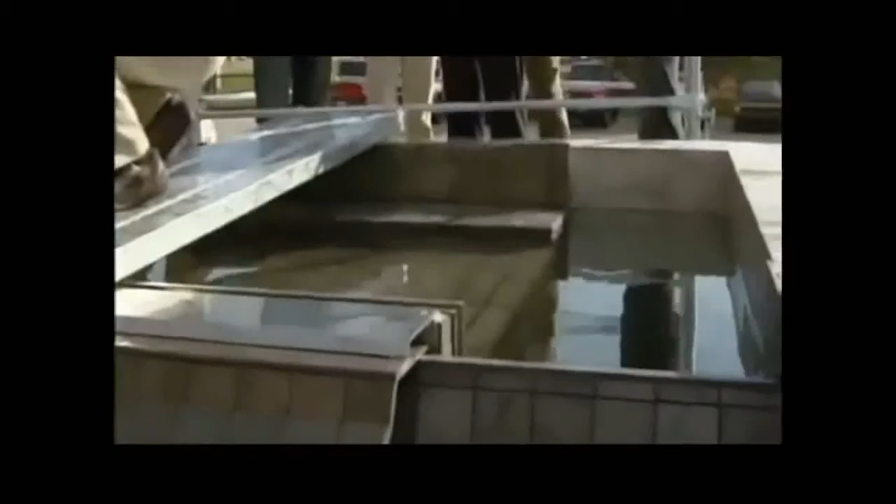What we've got here is the side of the swimming pool, which replicates the movement that we're going to get between the towers. And what the Natare guys have come up with here is a simple track system which can be pushed back and forward by a forklift. And that replicates the full range of motion that we have on the swimming pools, which can be 0 to 250 millimeters either way.

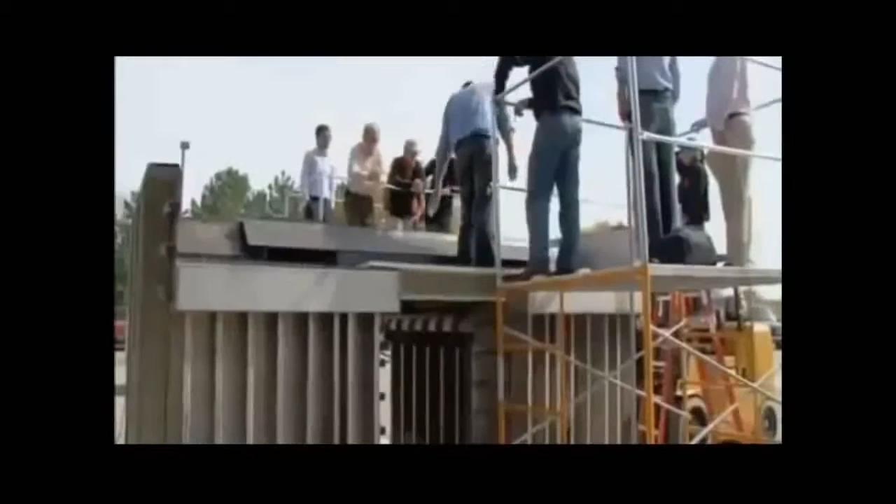It takes engineers weeks of testing before they're completely satisfied. Armed with the final results, McKee can now safely begin construction of the Sky Park. Consisting of some 10,000 tons of steel, the Sky Park is as big as an aircraft carrier. The most practical way for engineers to construct it is to break it into 14 segments on the ground before assembling it at the top of the towers.

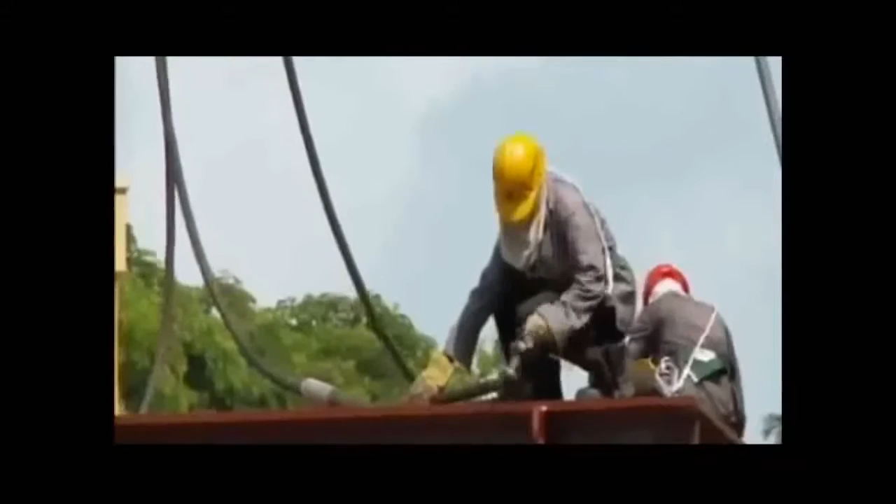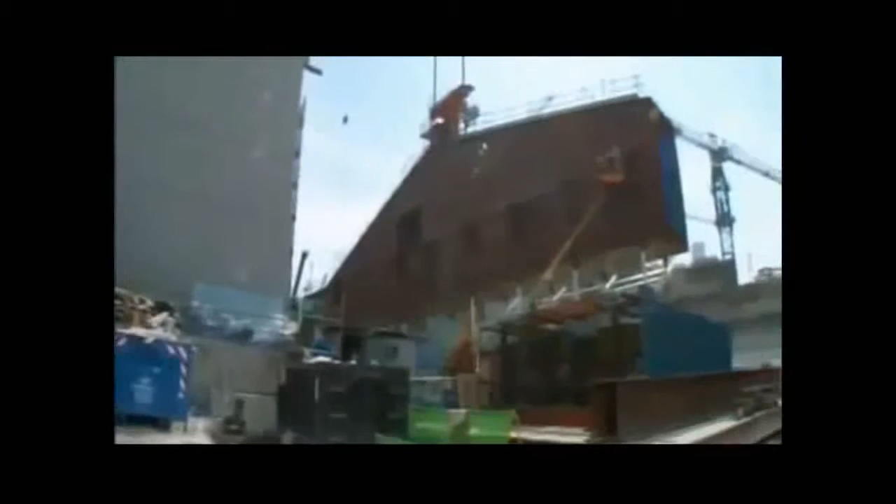There's no room for miscalculation at 200 meters in the air. Each segment is carefully prefabricated and tested by steel specialists Yongnam, and then trucked to the site independently. From the very beginning, McKee and his team anticipate that their biggest challenge will be lifting the 2 largest segments of the Sky Park, the box girders. Measuring 80 meters long, their combined weight is a staggering 1,400 tons.

How do we feel? A little bit of apprehension. You know, it's a significant lift that hasn't been done before. If something goes wrong, it could be really significant for us. To reduce risks, McKee turns once again to proven bridge building technology. In a process known as strand jacking, giant temporary lifting gantries made of strong structural steel will use powerful hydraulic jacks to lift the box girders up to the top of the towers before sliding them into place.

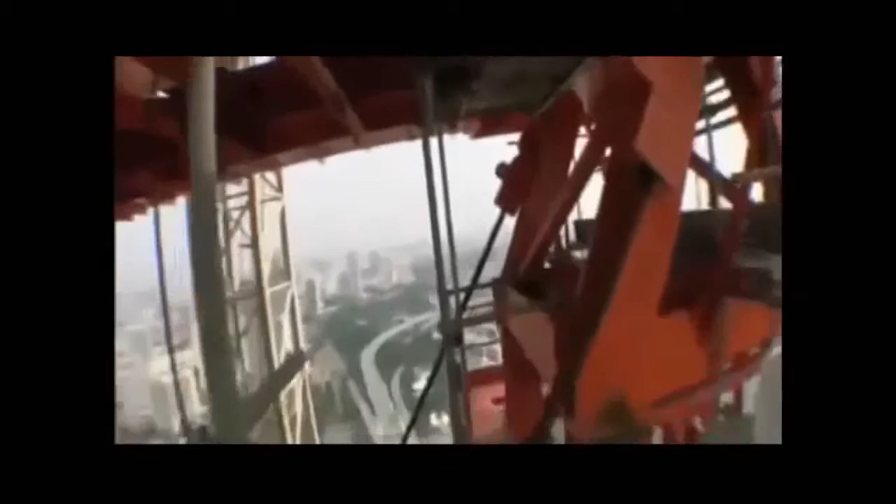It will be the longest and largest lift of its kind in the world, and McKee needs the best in the business. He puts a pioneer in the field in charge: Swiss-French company VSL. Engineer Eddie King and his team have successfully raised bridges, stadium roofs, and even Ferris wheels. The toughest part of my work is to plan everything very precisely, because everything is set up in millimeters. So we have to lift up, slide it in and position it with 5 or 10 millimeter accuracies. If we don't do it properly or safely, the biggest hazard is the thing can fall down to the ground.

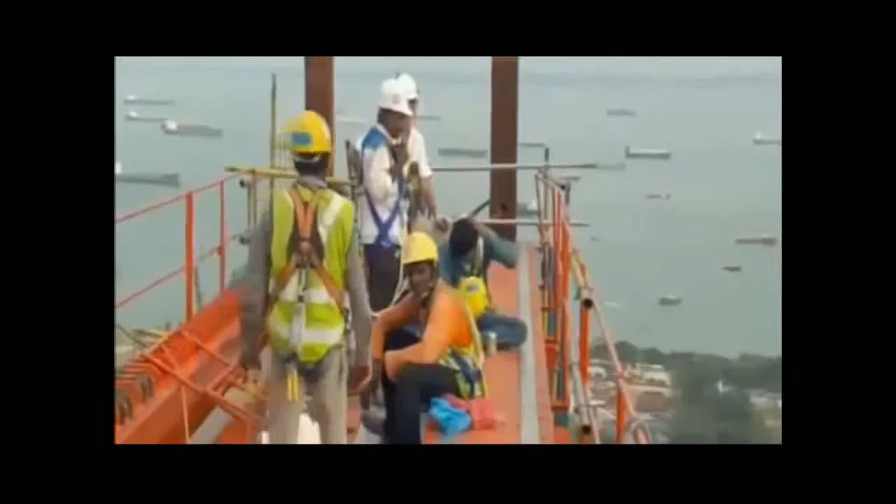Other factors further complicate the lifting process. Due to an increasingly tight schedule, the team is forced to conduct the lift during Singapore's annual monsoon season. It's almost impossible to predict when a tropical storm will hit. When it does, the accompanying lightning strikes can endanger lives. And because the whole operation takes place meters from a jam-packed highway, curious onlookers will be able to see any mistakes the engineers make. It's a potential public relations nightmare.

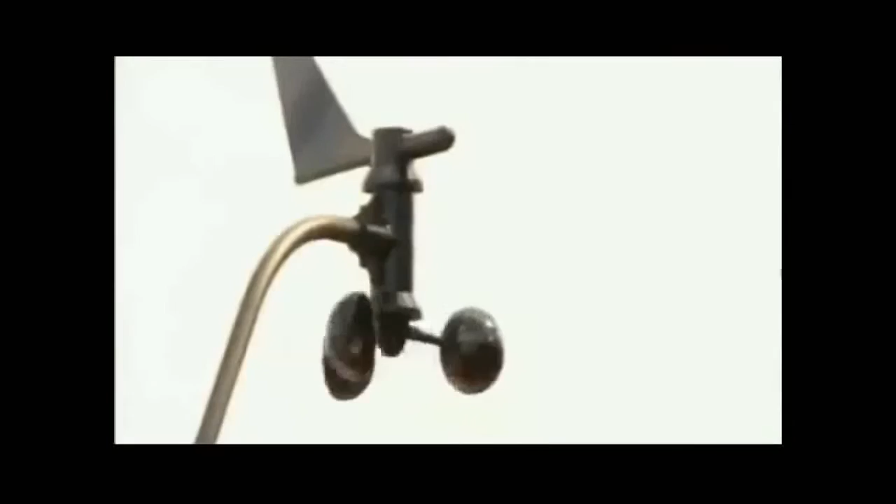Worst case scenario, we get stuck. And then we've got to figure out how to release it, how to continue lifting, because basically once we get going, we keep going. Okay, now I stop now. During an estimated 16-hour lift, the box girders will move at a cautious 14 meters per hour. Eddie King and his team constantly check their weather gauges for any incoming storms. The hydraulic jacks are also inspected regularly for overheating. No one wants the operation to stall in mid-air.

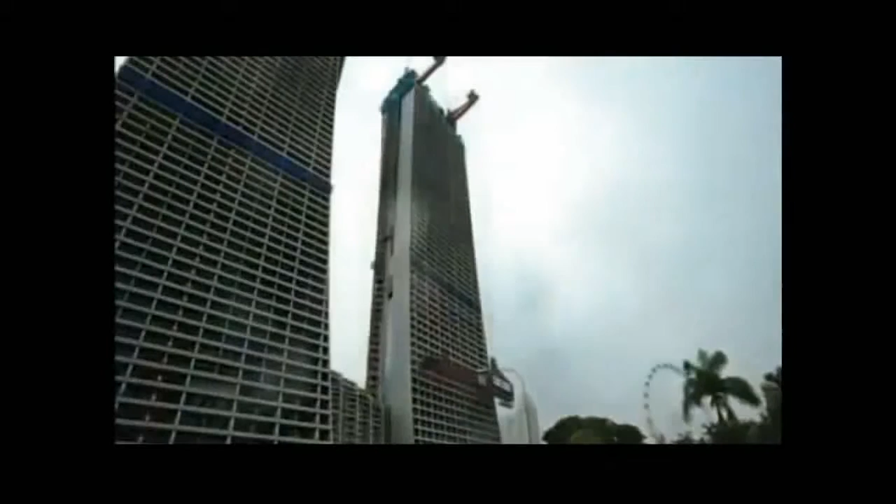Despite the team's best efforts, Mother Nature catches them by surprise. Okay guys, rain is coming. It's better we stop here. An approaching downpour threatens to grow into a lightning storm. We are at 200 meters above and surrounding buildings are quite far away. So there's a chance of the lightning striking on a high point like this. So we have to stop and wait until the weather gets better before we continue our lift.

McKee's worst fear comes true. If the girders remain stuck midway for too long, he will have to order them down. Okay. After a tense 3 hours, the lightning threat passes, and the operation cranks back to life. By the time the box girders slide into position, it's past midnight. Everything went quite smooth today, so we hope tomorrow we can do the same, smoothly bring it in and transfer it to the permanent position.

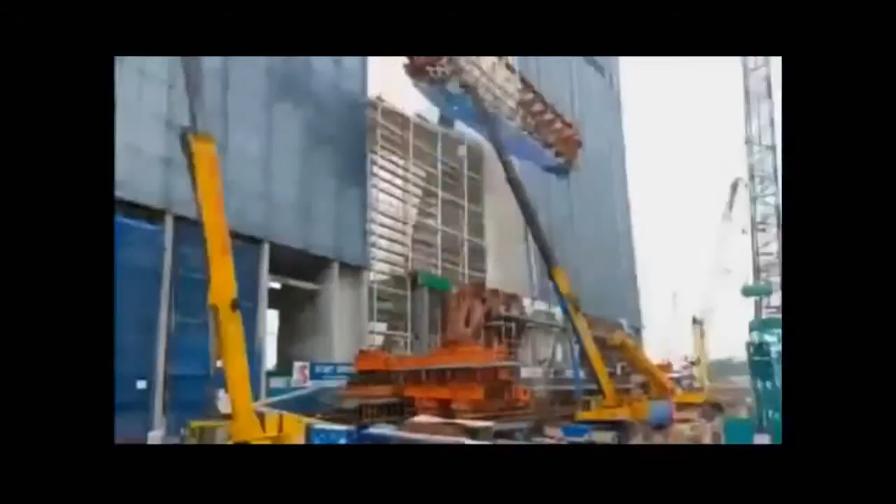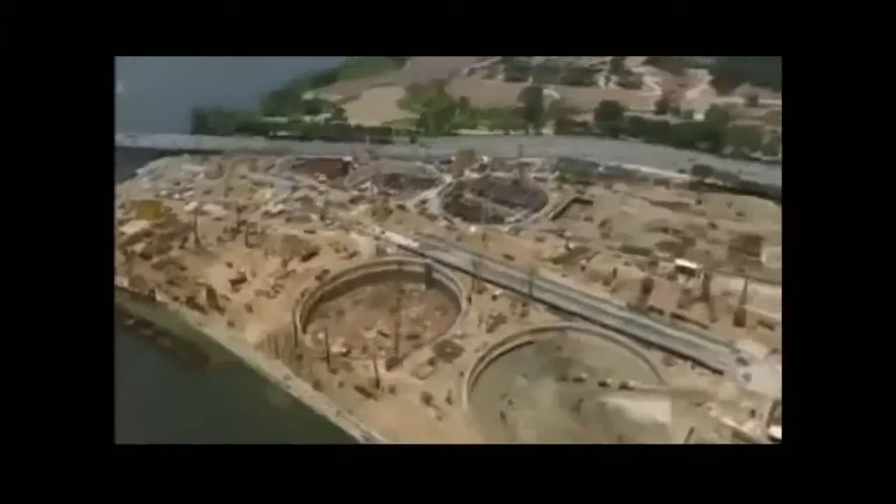With the lessons learned from the box girder lift, the rest of the segments go up smoothly. As the final piece rises into place, Singapore is already marveling at the team effort behind one of the world's most ambitious building projects. In just 3 years, engineers overcame seemingly impossible construction challenges, defeated marine clay, engineered ingenious design solutions, and survived the most debilitating financial crisis since the 1930s. As the finishing touches are put on the resort, the stage is set for an opening party, Singapore style.

Those involved reflect on the project that has already far surpassed their expectations. It's a bit overwhelming, you know. I'm in the process of disconnecting the umbilical cord. It's not easy for an architect. This type of project probably only comes around every 25 years or so. So it's been a lot of hard work, extremely challenging. I really can't imagine, I couldn't list the number of challenges we've overcome along the way to get to today.

Everybody is saying this is kind of a miracle, you know, never seen anything like it. And it's rewarding, it's nice. The Marina Bay Sands, Singapore. Proof that with visionary design and engineering know-how, megastructures can still defy the odds and fulfill the wildest dreams.